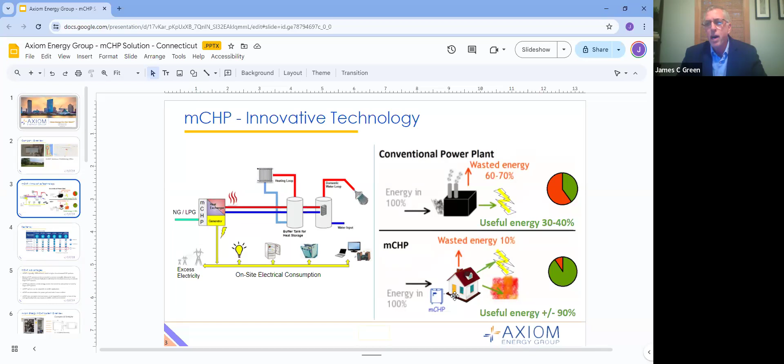In comparison to conventional power utilities, it's very efficient in the sense that in a conventional power plant, of 100% of the fuel that goes into generating electricity, only about 35% of it actually reaches the destination as you go through the distribution, the power lines - about 30 to 40% of the fuel used to generate electricity actually reaches its destination. However, with our system, microcombined heat and power, about 93% of the fuel used to generate the power is actually converted into electricity or heat.

One of the advantages of combined heat and power is that it's pretty resilient. It's not reliant on whether it's daylight or sunny, or if there's a rainstorm or hailstorm that it doesn't work. Because it's powered by propane or natural gas, it's pretty impervious to any inclement weather events.

It's very efficient. You can connect systems to make them modular, so if you need 3, 4, 5 systems connected for a particular application, you can do that. As I mentioned, this is micro, so it addresses a very niche market. It's not for large industrial combined heat and power systems cannot address the market we're able to address with this.

You can apply it to mobile applications. It helps decentralize the power grid to help it become more resilient. And these systems don't expire into toxic waste as some other renewable equipment does. This is essentially steel. It's an engine, and it's designed to be a very durable and long-lasting engine.

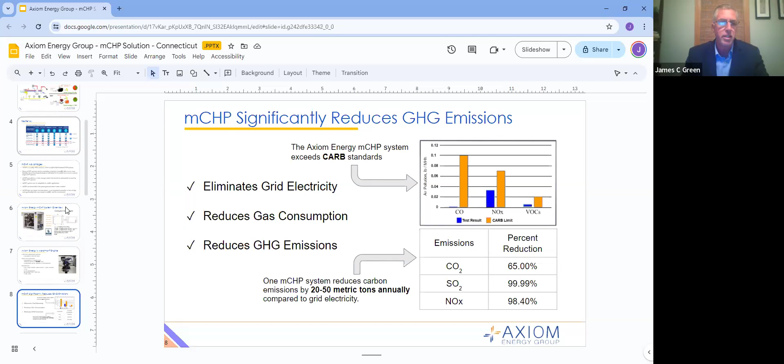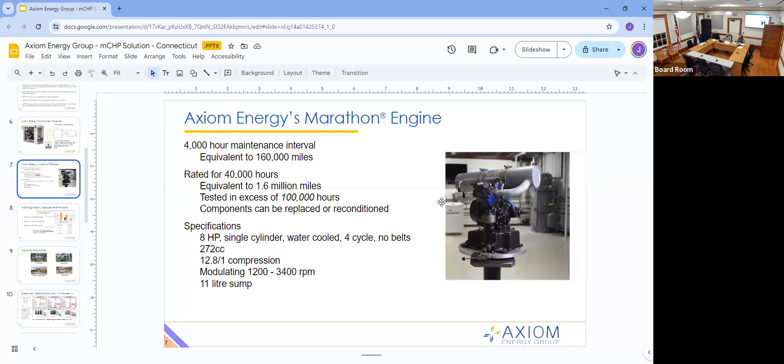Our system is designed to read the bottom of the tank. As long as the bottom portion is cold, our system continues to run. If it reads that the tank is starting to become saturated, it'll start to slow down and eventually turn off, and the entire tank is hot. So our system puts hot water in the top of the tank, and water leaves at the top of the tank.

So the reason you are consuming less gas is because, in the course of a day, I put the analogy with cars. If you have a car that gets 50 miles per gallon and a car that gets 20 miles per gallon, but the car that gets 50 miles per gallon, you slam on the gas and drive a quarter mile and stop.

And the car that gets 20 miles per gallon, you drive 10 miles an hour, but you're driving that speed the entire day. At the end of the day, you've driven 240 miles. Well, the car that got 50 miles per gallon, that you slammed on the gas and stopped, slammed on the gas and stopped, at the end of the day you also drove 240 miles.

But I guarantee that the car that drove 10 miles an hour, even though it's rated for 20 miles per gallon, got better gas efficiency than the car rated at 50 miles per gallon. So when you see water heaters firing on and flashing a buffer tank with 400,000 BTU of thermal energy, but only running 2 or 3 minutes before shutting off, the efficiency is not as good as our system that's running constantly.

The other thing that's interesting is the owner of this building had considered putting solar on the building. This is not to demonize solar - it has its place and it's part of the overall solution. But in this application, had he put solar panels on top of those buildings for the 5 days in Wisconsin that it's sunny, he would have had to put enough solar to generate that amount of electricity.

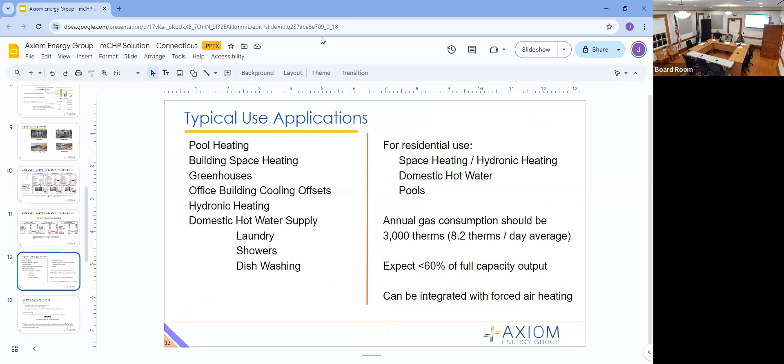Let me go through, we'll skip that slide, that just shows a larger building that we put it in. I just wanted to, before we go into the numbers, lay the reference for you for the typical applications: pool heating, space heating, greenhouse office buildings, hydronic heating, domestic hot water.

Typically you want the annual gas consumption around 3,000 therms a year. 15 therms a day would keep the system running at full speed, full RPMs, and full output. I would expect for a residential application, for the type of home like what Fred has, and I'm told Fred's home is typical in your area, to expect less than 60% of that full capacity output.

You can certainly find other uses if you've got a pool, and you're using it to heat your house and domestic hot water, to bump that number up. But a house can only, depending on its size, generate enough demand for heat. Our system would accommodate all of that and probably more.

So if I were to do an estimation for what I'd expect it to perform, and then get into the cost: if we expect it to run 60% of the time, sort of the max, and the kilowatt rate is 15 cents -- now the rate might be 15 cents, but if you look at all the taxes, demand charges, everything else, at the end of the day the actual cost is around 30 cents per kilowatt charge, if you agree.

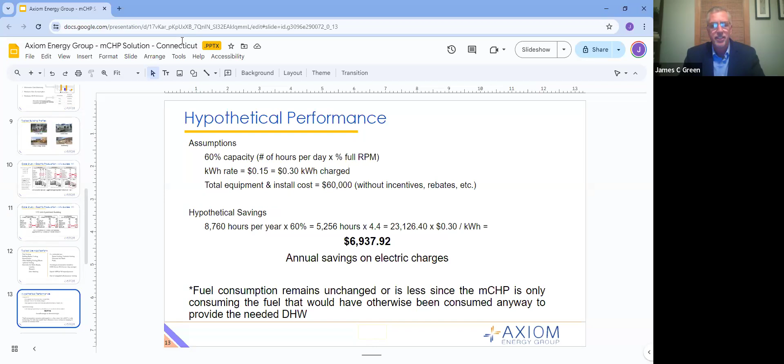It's a little bit more difficult than that, James, but you have the theory 100% right. We'll talk about that another time. That's still for the residential side though. As far as the correct CO2 calculations for greenhouses and things of that sort, that's a whole different ballgame. But as far as the theory and what this does...

This is very interesting, I looked it up before the meeting. I think there's potentially some opportunities to present this to a niche number of residents who can actually do that, and then take it from there.

The thing Fred Bird said last month was he's running it completely off propane, which is terrific because his power doesn't go down, he's not on natural gas, he has thermal, he has electricity, he has whatever he needs as long as he doesn't run out of propane. That's key to some of the things we've been looking at.

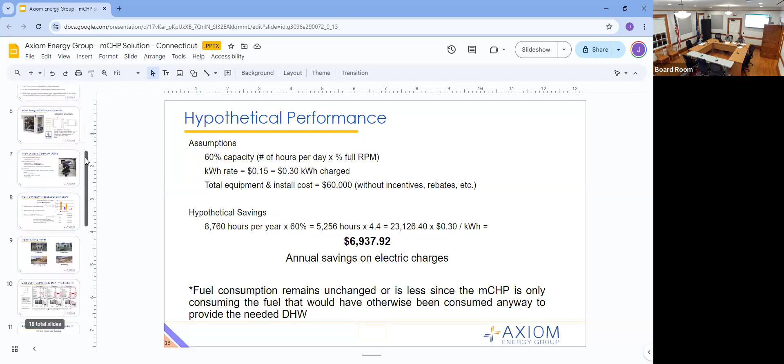It was kind of like the same thing with the generator, with the durability and resiliency and things of that sort. That's key to this, but if you can have the thermal and the electricity at the same time running off natural gas or propane, then you've covered all the safety, health, and power concerns we're talking about. So this has some great merit.

As far as when we go to greenhouses and stuff, that I know very well, so hold off on that right now because you have to handle it the right way, like using CO2 to bottle soda and beer. You need to treat that correctly, but you can get quad generation when you do cogen with that type of method, which is totally efficient at 92 to 98% efficient.

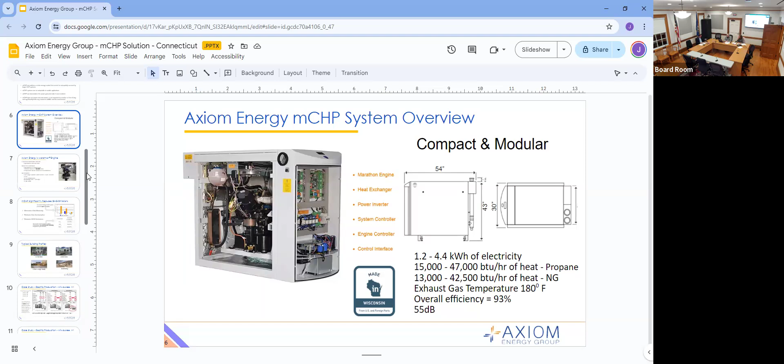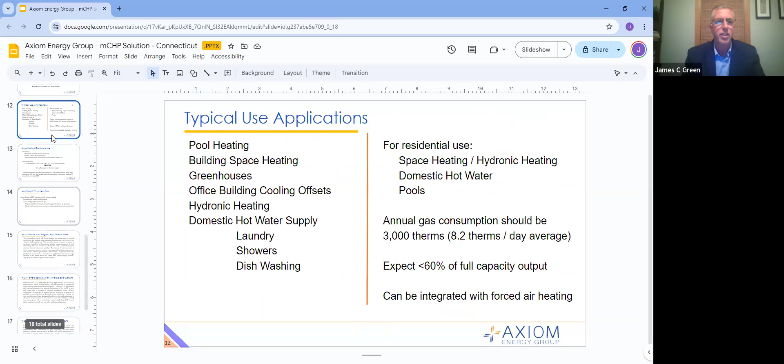This is just additional information we've covered already, the little slide I kind of skipped over. This is just to show that even in larger applications, you can use this system.

This was a 110 unit apartment building where the electricity dropped dramatically with just one unit. They called back and said, as a trial we put it in there, and then called back and said, we want as many of these as you can squeeze into every building we own. So they were very happy with it.

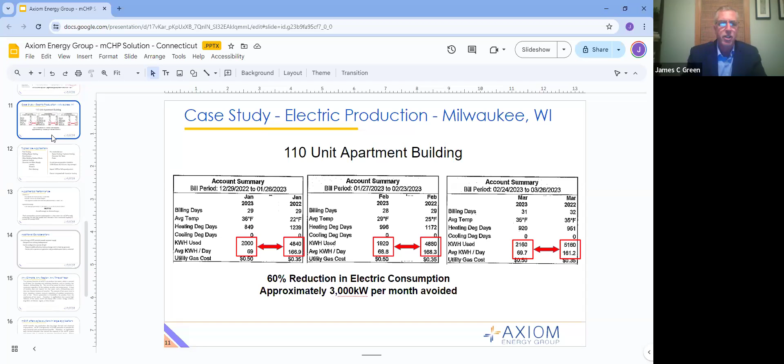So you look at what is the thermal load of the facility, and that's going to determine how many of these you'll need, because you could have a high electric demand, but if you don't have any hot water need or heating need, these become paperweights. They just sit there because their function is designed to produce hot water. So if you don't have a hot water need, unless you're just going to vent the heat and use it as a generator, which we don't recommend, you really need facilities like senior living facilities, a large home with a pool, multifamily, office buildings, things that have a larger hot water need or thermal demand. Then these are great applications.

So what cogen basically is, just to sum it up, you size the production of the electricity by the thermal demands. You try to match the thermal demands only, and then you put the electricity demands in, the engine, the turbine, whatever you put in for that, you match the thermal demand. So if you have a pool, if you have multi-residence, any of those items, that's what you match it to based upon what you put into your system.

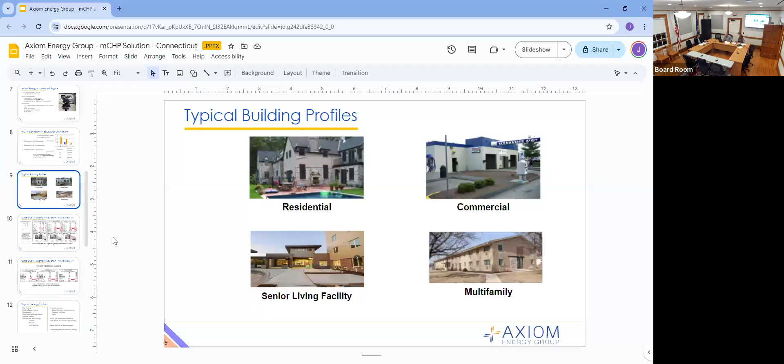So you're paying basically 10 to 15% more in natural gas or propane, but you're getting 40-50% more efficiency. Actually, I don't think you're paying more in gas. If you look at this bill, he's paying 30% less in natural gas, and he's getting the free electricity. You're not consuming more gas or propane. That's the point, in the right application.

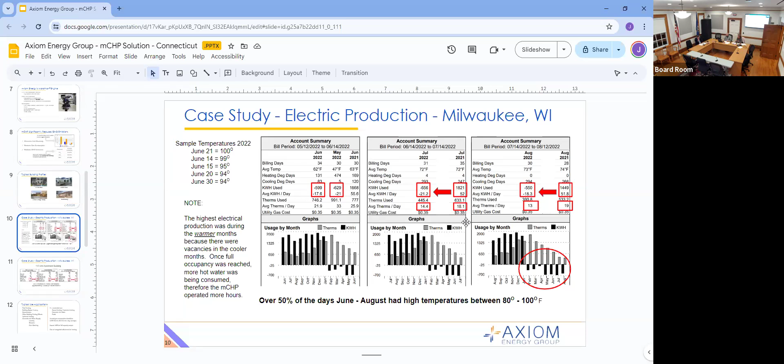No, I'm just wrapping my head around that you said the thermal needs and then you kind of determine the unit based on that. And I think there's certainly...

I apologize, I've accidentally muted. If you could unmute, allow me to hear. I accidentally muted the presentation.